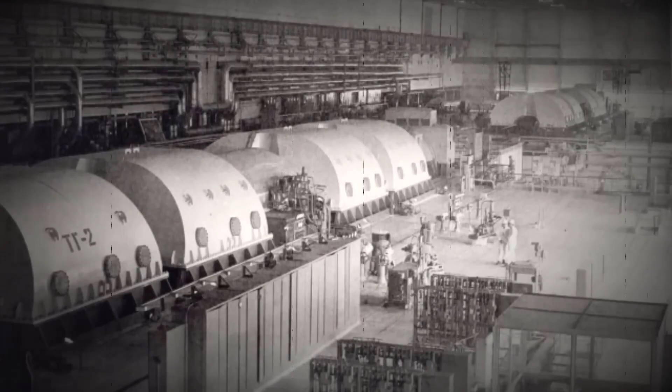The nuclear power plant had the first of its 4 reactors ready to operate in 1977, followed by number 2 in 1978. As a quick side note, Units 1 and 2 were the first generation RBMK-1000 reactors, and because of this they had slightly different core loadings and containment structures. But the remaining 2 reactors at Chernobyl were of a slightly more modern second generation, named Units 3 and 4, which went online in 1981 and 1983 respectively.

There were plans for another 2 units, but these were abandoned after 1988 when risks of contamination left the project untenable. The nameplate capacity of Chernobyl Nuclear Power Plant was Unit 1 at 1000 megawatts of electricity, Unit 2 at 1000 megawatts, Unit 3 also at 1000 megawatts, and the same with Unit 4.

In this video, I'll be focusing on the second generation RBMK, its design, and more specifically Unit 4. But I did look into the first generation in the Leningrad video.

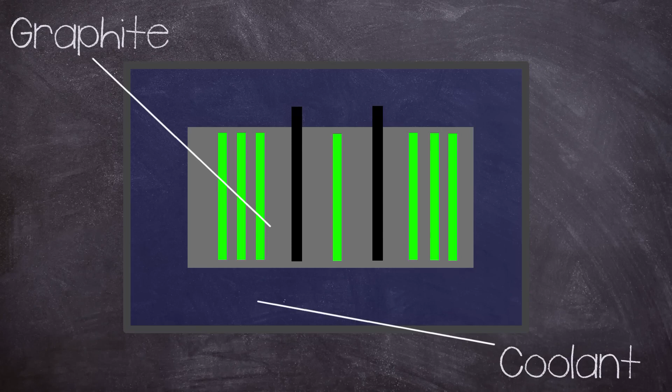The RBMK was a bit of a unique design in the reactor world, but it was a product of evolution rather than revolution, in that it used graphite to moderate the chain reaction with light water as a coolant. This combination allowed it to use lower enrichment uranium-235 for fuel, which is significantly cheaper than other reactor designs. The RBMK had a very large core region, 7 metres in height and 11.8 metres in diameter, mounted in a steel cylinder placed on top of a biological shield.

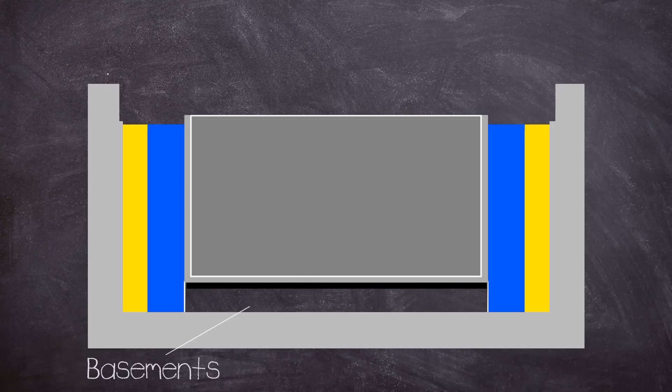The steel cylinder was 16mm thick and had a diameter of 14.52 metres by a height of 9.75 metres, dug into the floor of the reactor building, inside a reinforced concrete lined pit. Between the steel wall and the concrete lining, a water tank was placed, followed by a sand packing. Below the bottom biological shield, there were several basements used for pipework for the reactor core cooling loops.

The core consisted of graphite blocks sized 25 by 25 centimeters, stacked up with holes drilled through the center for fuel and control channels.

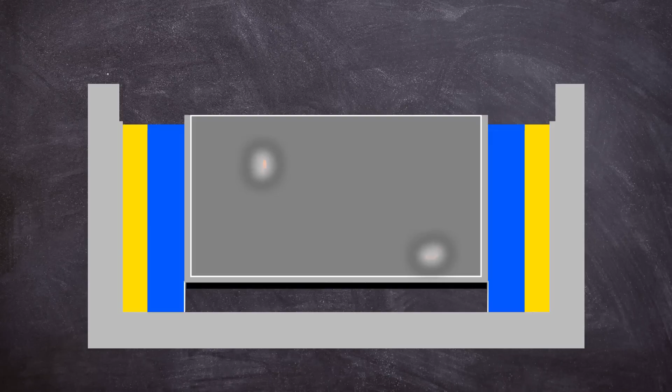The size of the core could cause issues in reactivity control during operation, but we will talk about that a bit later on. On top of the core, another biological shield was placed with a steel cover on top of it, which formed the floor of the reactor hall.

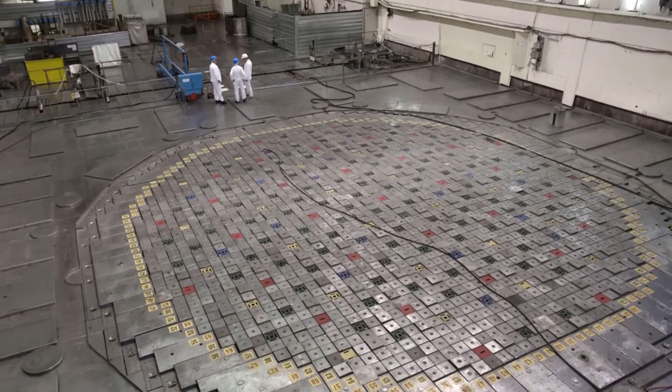The cover plate was capable of withstanding a pressure build-up resulting from steam released by two simultaneous channel ruptures. All of this allowed the design to be refueled whilst in operation, which helped with costs by reducing downtime. As a side effect, the confinement structure of RBMK reactors is less than ideal, as the tall refueling machine had to be housed inside the reactor hall. Because of the large floor space and subsequent roof requirements, the vast quantities of heavy concrete wouldn't have been architecturally, or more importantly, financially viable.

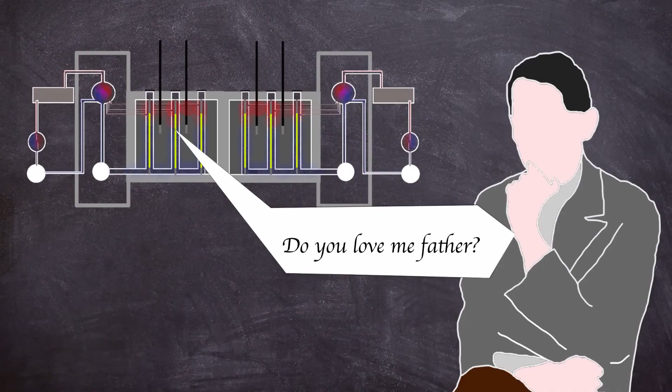The RBMK didn't have a prototype and was instead put straight into production, with the first reactor being installed in Leningrad in 1973. The original designs omitted confinement, instead claiming that the fuel being in its own channel with flowing cooling water was an acceptable alternative. The main takeaway from this is confinement was poor, resulting in disastrous results in the case of a fission product release.

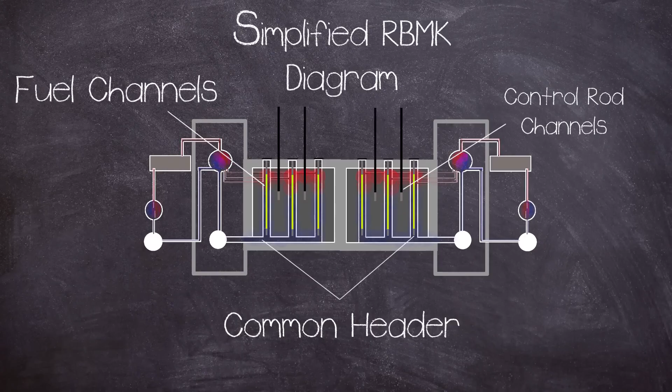The coolant was pumped through the core, from the bottom common header through high pressure tubes that jacketed the fuel elements, where the water would boil. Coolant water also circulated in the control rod channels. The primary cooling of the reactor was via two separate cooling circuits, one for each half of the core, meaning everything was doubled up, leading to four main circulating pumps, which were three operating, plus one standby per loop.

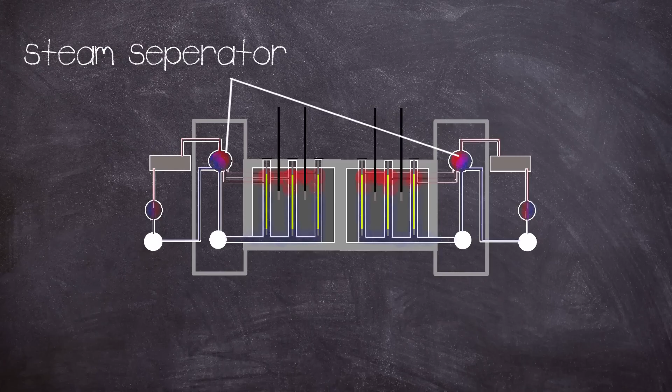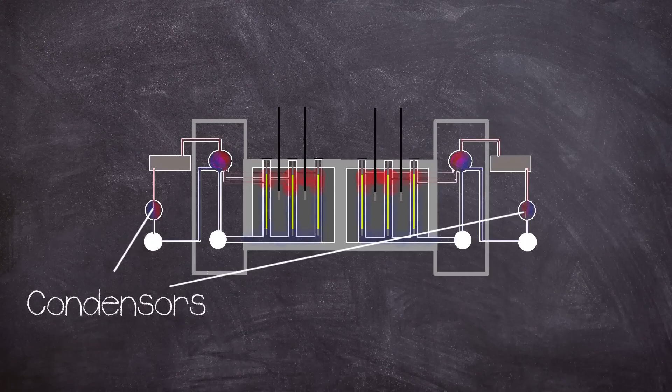As the coolant boils, it exits the top of the core and is passed through a water steam separator, which takes the steam to high then low pressure turbines which generate the electricity. The steam is then passed through a condenser that turns it back into water to be pumped back into the core, completing the primary cooling circuit. The condenser is cooled using a separate secondary water cooling circuit, meaning the primary cooling circuit is self-contained.

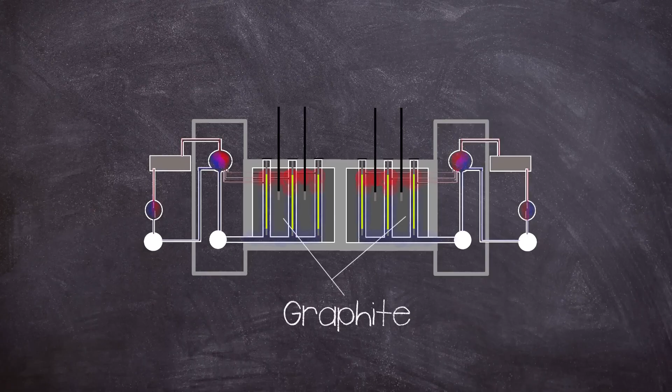As mentioned before, the reactor employed graphite blocks for its moderator. A moderator is used to reduce the speed of fast neutrons released from fission, so they can better facilitate a chain reaction, getting more use out of the fuel. Ideally, moderators work without capturing any neutrons, leaving them as thermal neutrons. But where the design has its potential flaw is having a separate coolant that can also absorb neutrons, which can make the reactor unstable in certain situations.

This brings up the big elephant in the room, and that is void coefficient. It wasn't just the graphite that had moderation characteristics, but the coolant water as well, because H2O naturally slows down and absorbs neutrons. This brings a problem for the reactor, as with the increase in temperature from fission, the coolant boils off into steam, known as voids, i.e. a bubble that does not absorb neutrons. With the steam not absorbing neutrons, this leads to an increase in the power of the reactor.

The RBMK did not rely solely on its coolant for moderation, because that's what the graphite was for, but the water did absorb neutrons, meaning that as it boiled off, operators had to compensate with the control system. If not properly managed, a runaway incident can happen as the coolant heats up, increasing reactivity, heating up the coolant more, creating more steam, leading to greater reactivity, and this is called a feedback loop. During this reactor state, more and more neutrons are produced and their density grows exponentially fast, creating a positive void coefficient. The risks of a feedback loop were greater at certain power levels, but this will be covered later on.

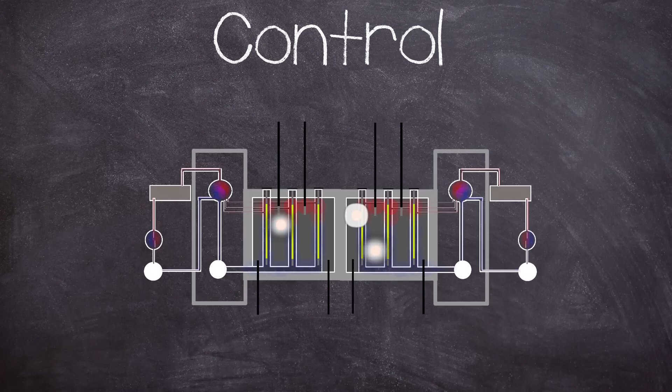Now this leads us quite neatly onto reactor control. As I said before, the core region was rather big, and this meant that the RBMK was kind of like multiple smaller reactors, in that hotspots could occur which needed to be individually managed.

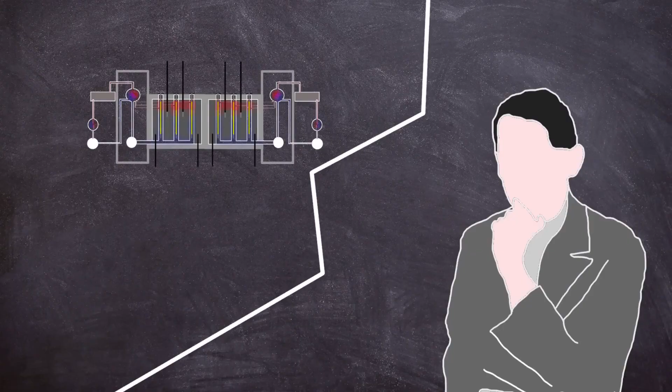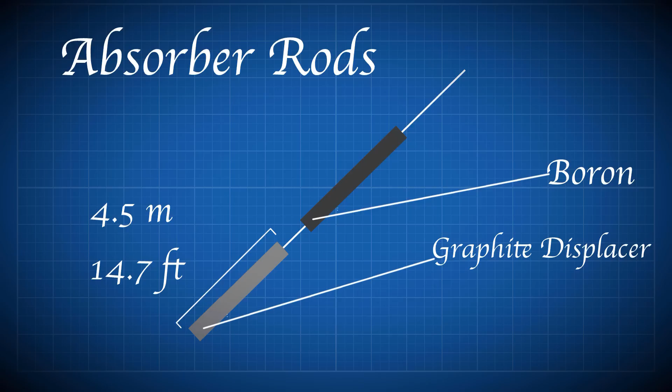This leads on to the strange design choice for both top-loaded and bottom-loaded control rods. There were 167 top-loaded rods and 32 shortened rods loaded via the bottom, and another 12 automatic control rods inserted from the top. The shortened rods were used to manage axial power distribution, which was necessary due to the core size to manage hotspots. The main control rods had a 4.5 metre long graphite rod, termed a displacer, attached to the end of the length of the control rods, except for the 12 rods that were used in automatic control.

The displacer connected to its rod via a telescope, with a water-filled space of 1.25 metres separating the displacer and absorbing rod. This was to stop water filling the space left behind by the control rod after it has left the core region, which would parasitically absorb neutrons.

Because removing one neutron absorber in the form of a boron control rod to be replaced by another neutron absorber, albeit weaker, in the form of H2O, kind of defeats the point of a control rod. Thus, if there was no displacer, then more control rods would be needed, as each one would have less of an effect on the reactivity of the core.

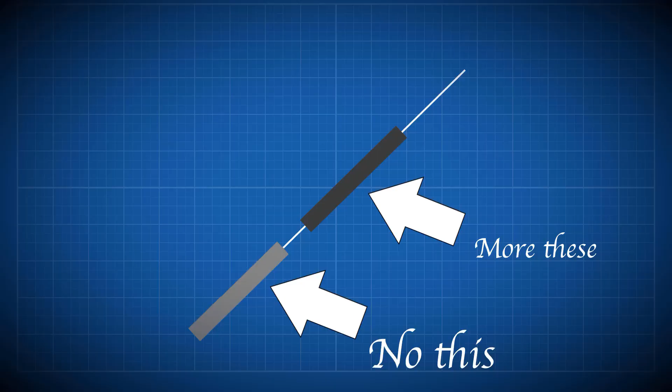The dimensions of the rod and displacer were that, when the control rod was fully extracted, the displacer sat centrally within the fueled region of the core, with 1.25 metres of water at either end. But this setup in certain situations could cause a positive scram effect.

On receipt of a scram signal causing a fully withdrawn rod to fall, water was displaced from the lower part of the channel as the rod moved downwards. This caused a localised insertion of positive reactivity in the lower part of the core.

This was because the RBMK had a high moderator to fuel ratio, meaning the lower part of the core would experience a spike in reactivity as the graphite displacer entered it, as it replaced the neutron absorbing water with neutron moderating graphite. But this situation was only dangerous at certain power levels of the reactor, which was meant to be mitigated by the knowledge and training of the operators, and also importantly by their management.

Part of this mitigation was by having an operating reactivity margin. The ORM is the number of equivalent control rods of nominal worth remaining in the core.

The total time required for a scram, or insertion of the emergency control rods into the core when starting from the upper limit stop switches, was around 18 seconds, which was relatively slow, but this was due to the size of the control rod channels and the fact that the coolant had to be pushed out of the way.

The scram could be initiated by the control system or manually via the AZ5 button. The control system employed on the RBMK 1000 utilised ionising chambers and various sensors both inside the core and outside, which were effective from power levels above 10% of total power.

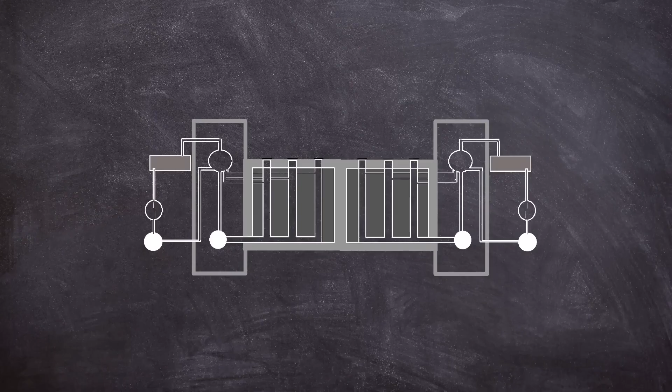The external detectors were all mounted mid-level of the core, meaning no low axial power monitoring could be undertaken. This meant that low power operation below 10% had to be done by the operators relying on experience and feel when monitoring the equipment. But manual low power control was only really intended for a cold startup, so to speak, when the reactor was free of the neutron absorbing poison Xenon-135.

I need to mention about neutron poison, as it will play a vital part later on, and was also a contributory factor in another RBMK incident, the meltdown in Leningrad in 1975.

During fission, some products are given off, one of which is Xenon-135, which has a high neutron absorption rate. This is okay when the reactor is in a steady state, as it burns off this undesired byproduct, as poison burning is proportional to reactor power.

But when the power of the reactor is decreased, the Xenon-135 is not burned off, and can shut down the chain reaction by absorbing too many neutrons. This is known as an iodine pit.

All is not lost, as Xenon-135 has a relatively short half-life of around 9.2 hours, so a reactor core is considered poison-free after several half-lives have passed.

But this is not good from an economic standpoint, as the unit would be shut down for a few days, which is where good management is meant to come into effect, where safety is prioritised over money. But in the former USSR, taking a reactor out of action for a few days could have a detrimental effect on one's career longevity.

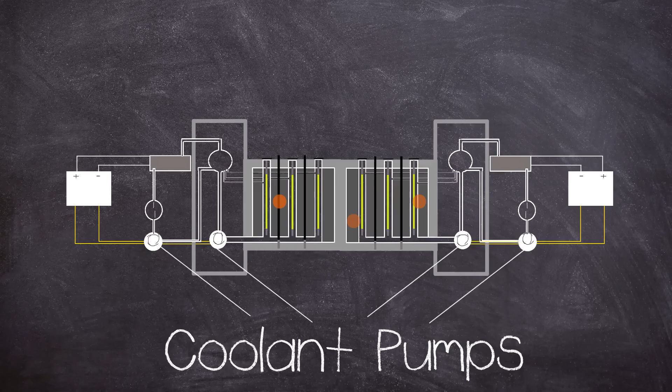And when the reaction stops, this continues, at least for a while after shutdown. During power operation, this is fine as electricity is being produced, but after shutdown, the pumps need to keep circulating to remove the decay heat.

Usually the electricity needed for the pumps can be drawn from the national grid. But what about if there is a full power outage? Then backup is needed. This presents a problem. If for any reason, scheduled or not, a reactor is shut down and there is a power cut, how will the pumps keep working?

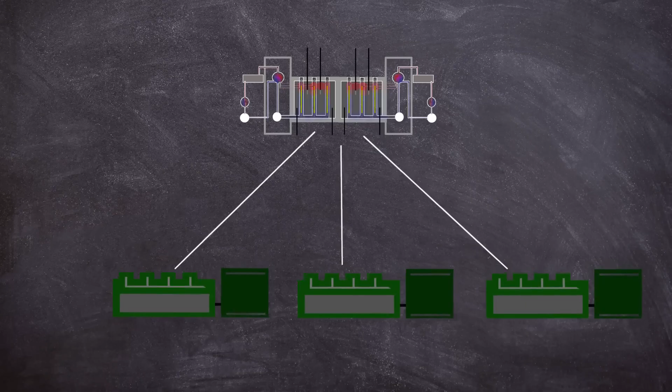Well, the solution is pretty simple, and that is a diesel backup generator. Each of Chernobyl's reactors had 3 backup diesel generators, which took in excess of 70 seconds to reach full power. Too much time in the event of a full power cut.

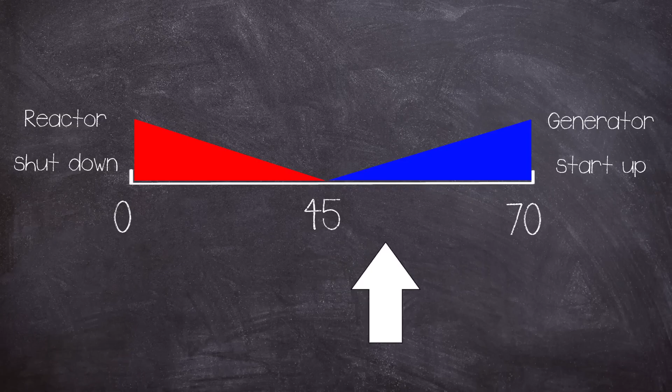In theory, some of this time could be covered by the spool down of the turbo generators, which was theorised to cover around 45 seconds. Not the full time needed, but possibly enough to prevent fuel melting.

To prove that this could work, it had to be tested out, and in 1982, 1984 and 1985 this was attempted, but all tests failed to produce the electricity needed to run the pumps. The test was to be conducted again in April 1986.

Strangely, the test procedure that was written hadn't taken into account the eccentricities of the RBMK reactor, especially at low power outputs. The test was to be conducted during a routine shutdown.

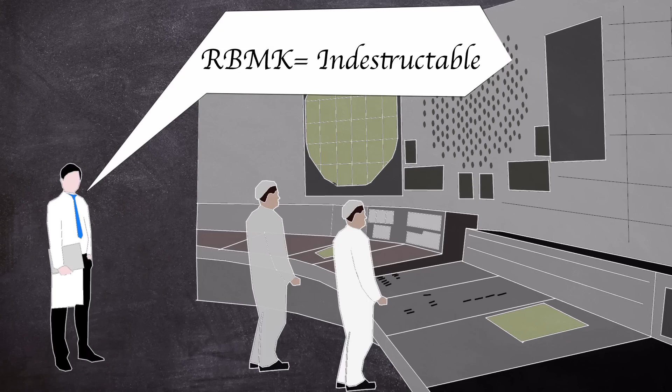For the test to go ahead, some vital systems had to be switched off, most notably the emergency core cooling system used in a loss of coolant accident. This required the chief engineer to sign it off.

In preparation for the test, the following had to be set up. The reactor power was to be reduced to between 700 and 1000 megawatts of thermal energy, and the steam turbine generator was to be at normal operating speed.

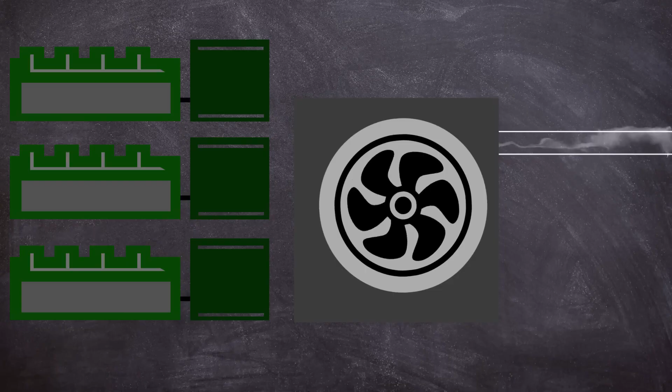After all this was sorted, the preparations for the electrical test could go ahead. The steam supply to the turbine generator would be closed off. The turbine generator performance would then be monitored to see if it could bridge the power for coolant pumps until the emergency diesel generators took over.

When the emergency generators supply electrical power, the turbine generator will be allowed to continue freewheeling down. The normal planned shutdown procedure of the reactor was then to be completed.

The date of the test was to be the 25th of April 1986, 15 minutes past 2 p.m, completed by the day shift. As such, the operators were briefed on the procedure and a team of electrical engineers was present.

At around 1 a.m. on the 25th of April, the reactor was gradually powered down to around 50%, in time for the day shift. At 1:05 p.m, the turbo generator TG7 was switched off. The 4 main circulating pumps, 2 electrical feed water pumps and other electrical equipment connected with this turbo generator were switched over to bus bars for the turbo generator TG8.

The ECCS was disabled with the correct authorization from the chief engineer, but just after 2 p.m, the Kiev electrical controller asked for the test to be postponed to cover the evening electrical peak demand. The request was due to another power station in the region unexpectedly going offline. Chernobyl's director agreed and the test was pushed back, but the ECCS was not reinstated.

The status of the ECCS showed the lack of safety culture at the plant. Although the system wouldn't really be a factor in a disaster, it highlights the management culture at the time.

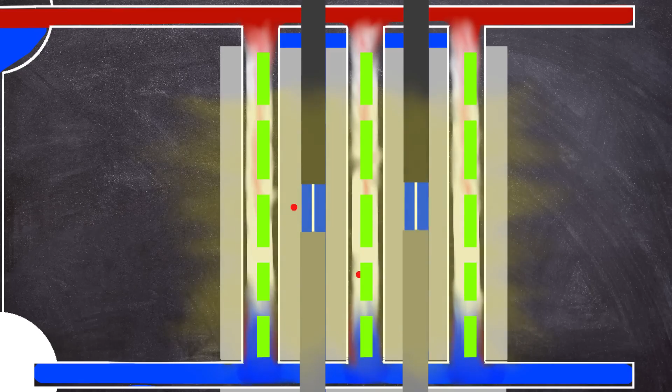This reduced the power of the reactor without any operator intervention to 500 megawatts of thermal energy, at which point manual intervention was started in order to maintain the level.

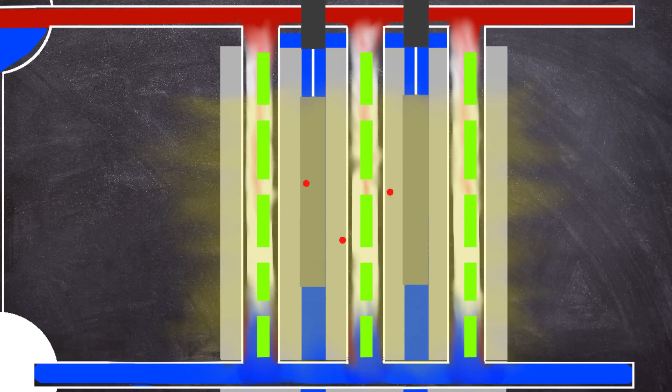At 28 minutes past 12 on the 26th of April, the reactor power had dropped to just 30 megawatts of thermal energy, with a near shutdown-like state. It is not 100% known why, but both equipment failure and operator error have been attributed to the reactor state.

As set out in the operating instructions, the reactor should have been powered down to wait for the xenon-135 to decay, but shutting down the reactor without doing the test wouldn't have made many friends in management. To increase the power, the control rods began to be removed to try and overcome the poisoning of the core, reduced coolant void and graphite cooldown.

In the attempts to raise the power, the operational reactivity margin was violated by removing more of the absorbing control rods, and by 1 AM around 200 megawatts of thermal energy was reached. The reactor was now in a dangerous state. Not wanting to leave empty-handed, Dyatlov insisted that the test be conducted at the current power level.

In reality, the core was heavily poisoned and was in a dangerous state with very few absorbing rods for emergency control. During the preparations of the test, the operators powered up the 2 backup coolant pumps, leading to all 8 working. The increase in water flow reduced the voids within the core, which would have set off an automatic scram, but this was bypassed by the operators.

As the coolant absorbed the neutrons in the core, only 8 control rods were left as a safety margin. The minimum that the ORM stipulated was that around 28 rods should have been in the core. The reactor started to experience a feedback loop. With not many rods in the core to manage the power, the water in the reactor found itself being the main neutron absorber, and disaster was just waiting to happen.

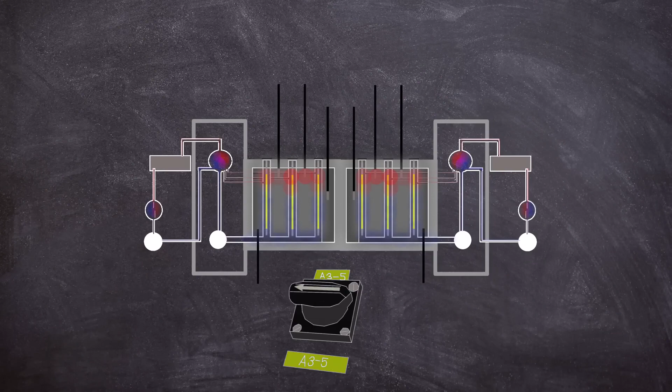At 1:23 in the morning, the actual test had now begun. The command given to stop the valves for turbine number 8 closed and the rundown operation started. As the turbine spooled down, the power to the feed water pump slowed, increasing the temperature of the coolant, creating more voids. With less water absorbing neutrons, the power of the reactor began to rise.

A feedback loop was beginning to start in the lower part of the reactor core. The operators pressed the AZ5 button in response to the worrying increase in power, and the control rods started their travel into the reactor core.

As the control rod attached graphite displacers moved down to the lower part of the core in their control channels, the neutron absorbing water was pushed out of the way, creating a momentary spike in power, replacing it with neutron moderating graphite. During the spike, some of the fuel rods ruptured, blocking the control rod columns, stopping the control rods at 1/3 insertion. This left the graphite water displacers stuck in the lower part of the core, increasing the runaway power excursion. Within 3 seconds, the reactor power rose to 530 megawatts of thermal energy.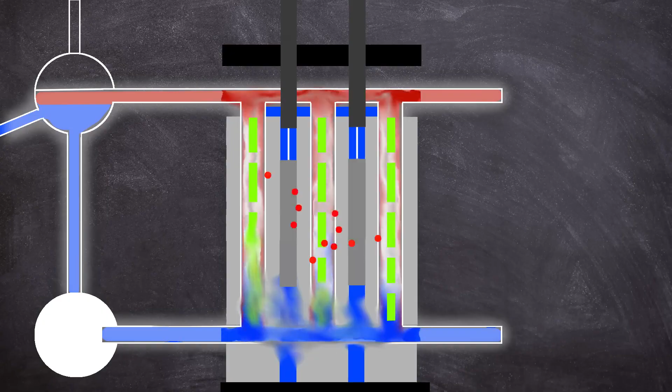In the control room, a few shocks were felt, and the control rod indicators showed that the insertion had stopped. As the channel pipes began to rupture, mass steam generation occurred as a result of depressurization of the reactor cooling circuit. Fission materials leaked into the coolant, and steam pressure grew inside the core as the coolant boiled off, creating a greater neutron population. The reactor power hit 30,000 megawatts of thermal energy, although it is thought that the power could have gone much higher than that during the excursion.

The steam blew off the top steel cover and top biological shield of the reactor as more than the 2 designed fuel channels failed, releasing debris into the reactor building. This was what would later be described as the first explosion, but it would not be the last.

A second, more powerful explosion occurred between 2 and 3 seconds later, and this destroyed the roof and ejected superheated pieces of graphite out of the reactor hull, peppering the area around the building with shrapnel. Some red-hot material fell onto the roof of the machine hall and started a fire. It is thought that around 25% of the core material was ejected.

The now uncovered reactor core mixed with the outside air and ignited a graphite fire. A blue glow could be seen outside the reactor building from ionizing radiation emitting from Unit 4. There was nothing left of the reactor confinement structure, which meant little stopped the harmful contamination from escaping.

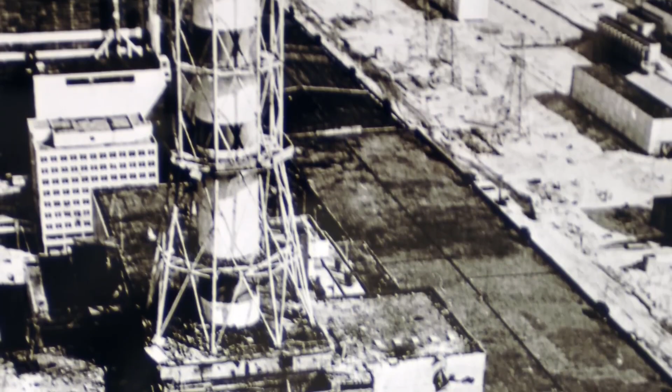Some of the debris that was ejected started a fire on the roof of Reactor 3's building, but insanely the unit wasn't shut down straight away. Instead, the operators were told to take iodine tablets and don respirators.

At 1:45 in the morning, the first responders from the Chernobyl fire team arrived under the command of Lieutenant Vladimir Pravik and began trying to extinguish the flames on Unit 3's roof. All around them lay pieces of Unit 4's graphite core. The firefighters were only aware of the fire, and because of this they didn't have any radiological protective clothing on. As they worked, they breathed in some of the fission material in the form of dust and were exposed to the deadly radiation.

Many would come down with acute radiation sickness shortly after. Some of the first responders felt a metallic taste in their mouths, similar to what others had reported post-exposure, for example from the victim of the Wood River Junction criticality.

The fires on the roofs of Units 3 and 4 were under control between 2:10 and 2:20 in the morning, and the fire was fully put out at 5 o'clock in the morning. However, the graphite fire in what was once Unit 4 continued to burn, expelling its radioactive plume of dust, steam and smoke into the atmosphere.

The operators started to pump water into the core, but this did little to bring the situation under control. The estimated dose of 5.6 Röntgens per second was experienced around some parts of the reactor building, which is equivalent to more than 20,000 Röntgens per hour, enough to give a lethal dose in minutes.

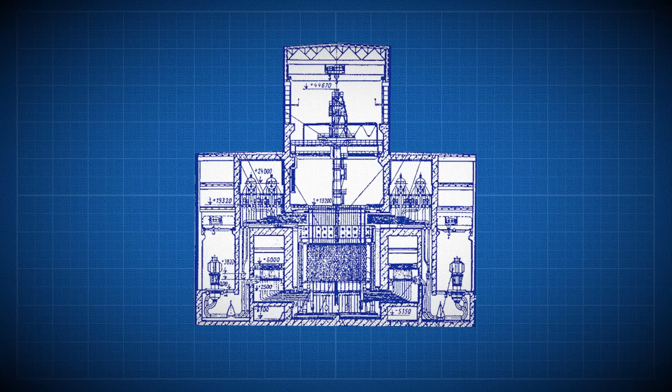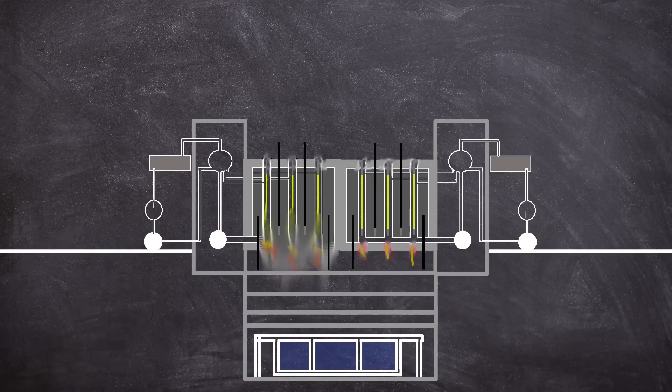The firefighting efforts and pumping of coolant water left the basement flooded, which caused another potential disastrous outcome: another steam explosion. The fuel from the core was melting towards the flooded basement, but below that was more water from the bubbler pools, a large reservoir for the emergency cooling pumps and a pressure suppression system.

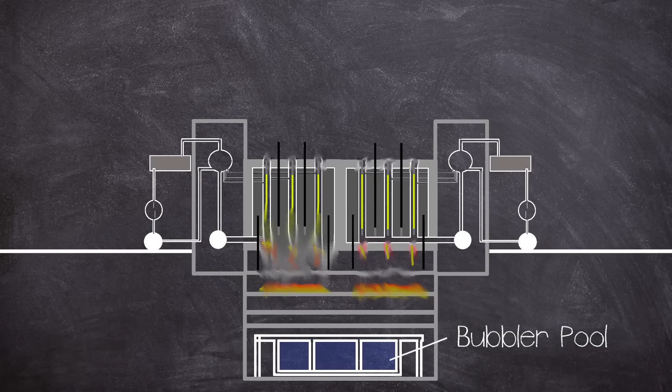This was the next point of focus for the accident management team. Engineers Alexei Ananenko and Valery Bespalov, along with supervisor Boris Baranov, volunteered to empty the bubbler pools. This was done via valves controlling sluice gates, housed in a now-flooded room. All three men donned protective suits and breathing equipment and made their way down the corridor. The men were successful, and the bubbler pools began to empty.

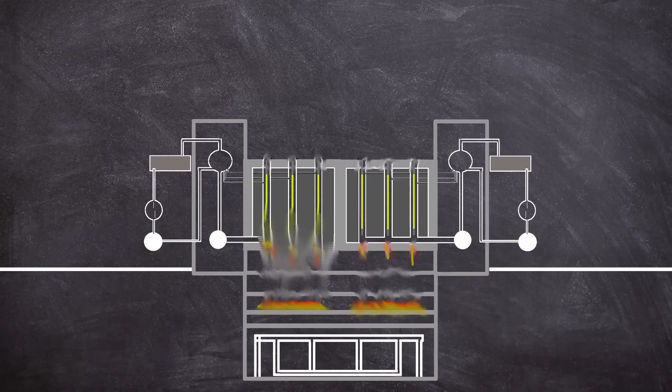Surprisingly, all three survived not only the day but continued to live long after the disaster, having averted the immediate steam explosion. But that wasn't the end of the worry over a deadly explosion. As described in the film China Syndrome, the core could continue to melt through the floor of the containment and into the earth, eventually hitting the water table, meaning another steam explosion.

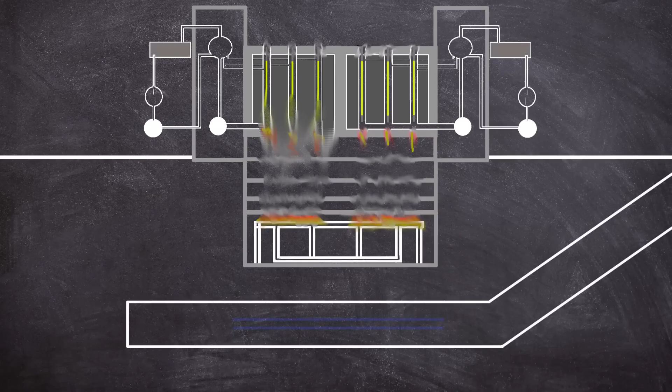The next focus of the accident management team was stopping the molten core from escaping the bottom of the reactor basement. A design thought up by physicist Leonid Bolshov involved digging out a cavity below the reactor building basement. The concept used a coiled formation of pipes cooled with water and covered on top with a thermally conductive graphite layer, encapsulated between two sacrificial concrete layers, each one metre thick. In theory, as the molten uranium oxide hit the graphite, it would rapidly cool down, catching the core meltdown.

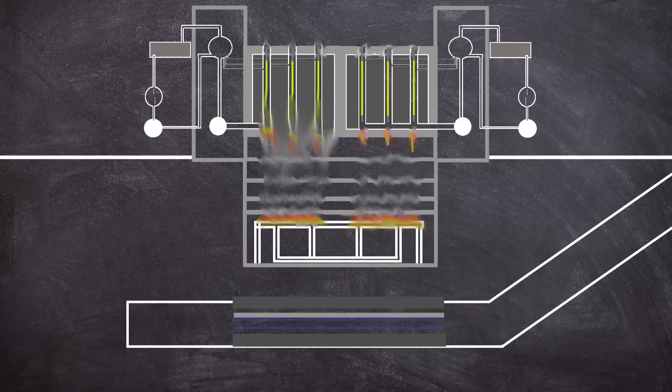Thankfully, the theory didn't have to be put into practice, as the core had finally come to rest in one of the lower basements of the reactor building, part of which formed the famous Elephant's Foot, discovered in December 1986, which had a radioactivity of 8,000 roentgens, or 80 grays per hour. For reference, a whole body dose of around 5 grays can be lethal.

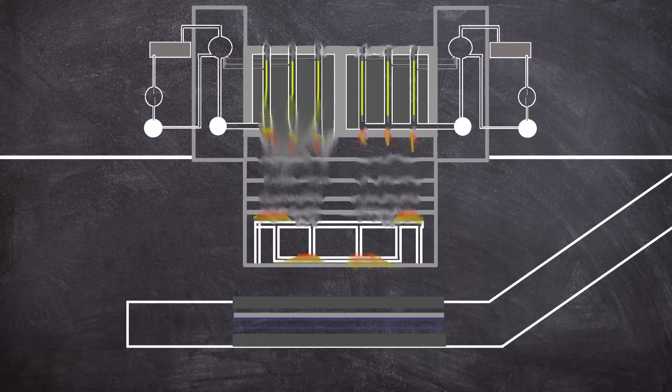The molten material is known as corium, a mixture of the material found inside the core, mainly made up of silicon dioxide with traces of uranium, graphite, zirconium and titanium. The excavated cavity and cooling system, now unneeded, was filled with concrete to help the structural integrity of the heavily damaged reactor building.

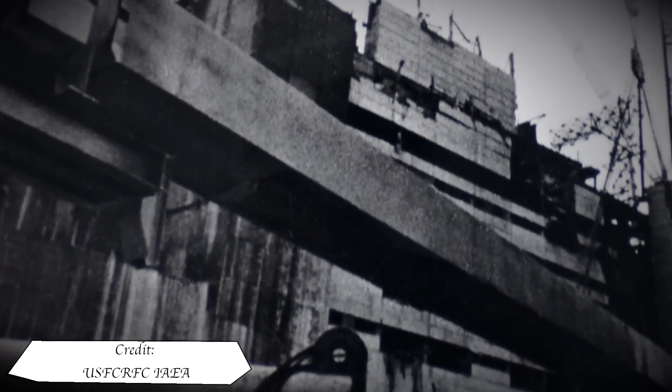A plan was conceived to contain the contamination release of Unit 4 in the form of a concrete lid, which would come to be known as the sarcophagus. Construction began in May 1986, 24 days after the disaster, to encapsulate some 200 tonnes of radioactive corium, 30 tonnes of highly contaminated dust, and 16 tonnes of uranium and plutonium. The construction would last for 206 days, between June and late November of the same year.

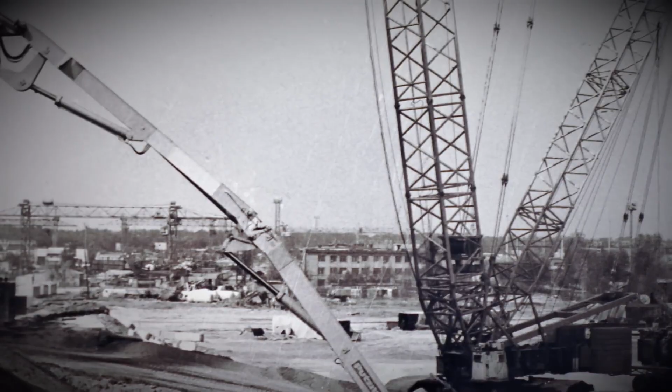But before the core could be enclosed under the sarcophagus, the next phase of remediation was to remove all the core material scattered across the area, and one of the most dangerous places was the roofs of the buildings surrounding Unit 4. Initially, robots were thought capable of undertaking the clearing works, but due to radiation interference, only around 10% of the debris could be recovered.

This necessitated the use of good old-fashioned people. The most basic equipment was needed for the task, including protective clothing and a shovel. A total of 5,000 people, known as liquidators, were called upon to undertake the cleanup on the roof, each only allowed between 45 to 90 seconds of total working time to reduce the risk of exposure. The calculated risk was 25 rem, or 250 millisieverts, of radiation per person.

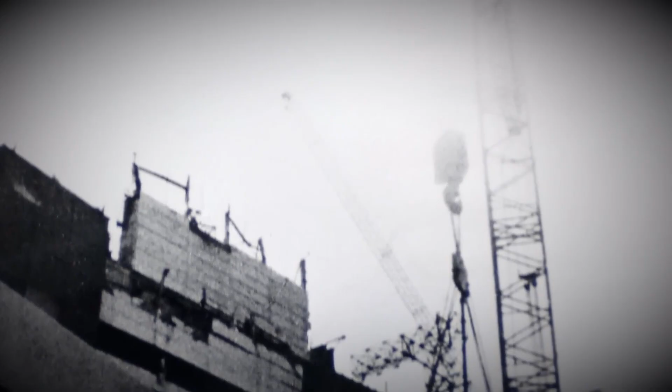There were many more liquidators also used for other clearing-up works in the wider area. Finally, after this, the sarcophagus could be closed over the turbine hall and reactor building. The construction was undertaken over 8 stages, all whilst Unit 4 released contamination, next to Unit 3, which still needed to be operable. Concrete containment walls were built around Unit 4, and a dividing wall was erected between it and Unit 3. The sarcophagus was placed on top of the concrete containment walls.

More than 400,000 cubic metres of concrete and 7,300 tonnes of metal were used during the construction of the sarcophagus. The building encapsulated an estimated 740,000 cubic metres of heavily contaminated debris together with contaminated soil. Holes were installed in the structure to allow pressure release, albeit through a filtration system.

The shelf life of the structure was only thought to be around 20 to 30 years, necessitating a new containment structure, but this will probably be covered in the next video in this series. So, with an official death toll of 31, a nuclear power plant essentially unusable, and many decades ahead of remediation works, how was Unit 4 allowed to be operated in such a dangerous state? Unsurprisingly, it comes down to management.

The warning signs of the potential for fuel damage in an RBMK 1000 reactor reared their heads several times through the reactor type's history. A partial fuel melting in Leningrad over 10 years before, in 1975, had been covered up, and information was not passed on to other RBMK operational staff at different power plants. Again, the fuel melting incident that happened in 1982 at Chernobyl Unit 1, no less, was also covered up, this time by Viktor Brukhanov, meaning lessons again were not passed on.

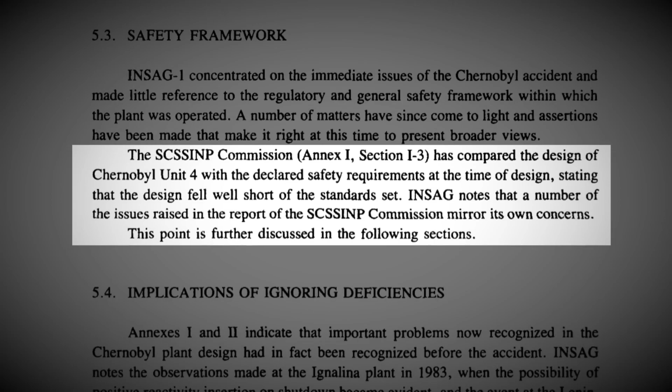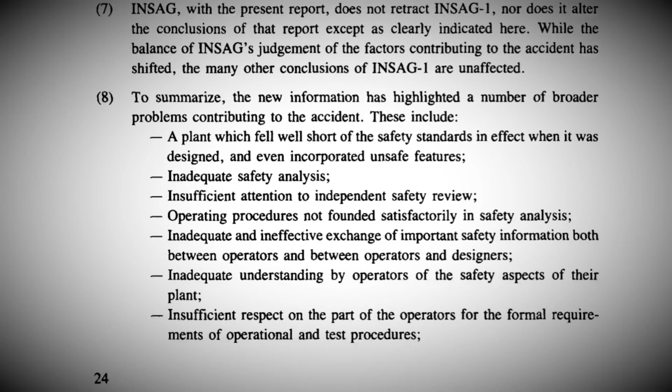This was all highlighted in the 1992 INSAG-7 report, which also said in its summary: the plant fell well short of the safety standards in effect when it was designed, and even incorporated unsafe features, compounded by inadequate and ineffective exchange of information between both operators and between operators and designers. There was an inadequate understanding by operators of the safety aspects of their plant, also affected by insufficient respect on the part of the operators for the formal requirements of operational and test procedures.

The industry in the USSR had an insufficiently effective regulatory regime in place to counter pressures for production. The pressures from central government and lack of awareness of the design risks of the reactor meant that management acted dangerously in the false pretense that the RBMK was indestructible. Pretty much the entire management structure was throwing around a grenade that they didn't know had the pin pulled out of, meaning disaster was only a matter of time.

Now I'll be following up this video with another video at some point about the wider impact of the disaster on local and wider population, as well as digging deeper into the liquidators and their heroic work. Thanks for watching, I hope you enjoyed the video.